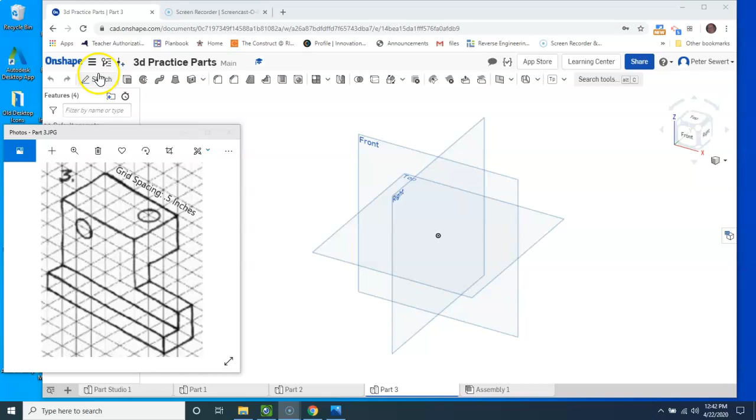I'm going to start my sketch plane on the right side, and then view normal. I'll start with my customary rectangle, and come up. The first dimension here, when I counted all the blocks, was 2 by 2.5 tall. There we go.

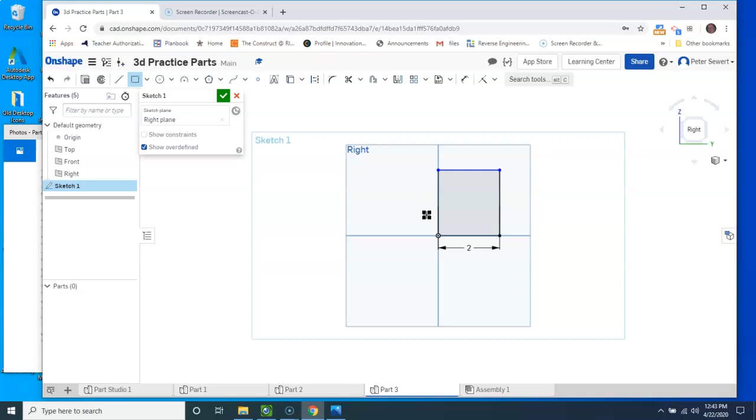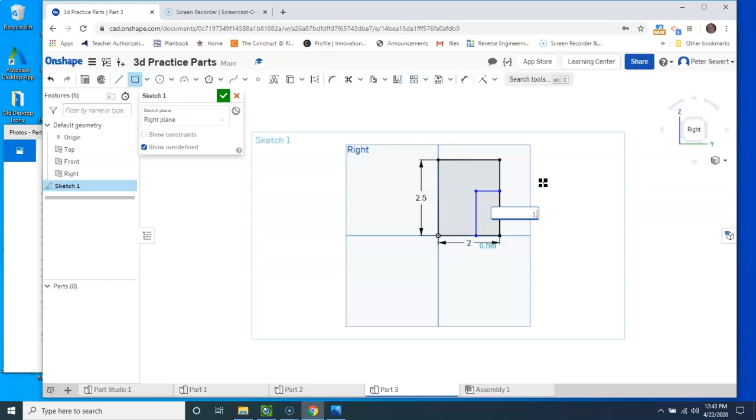Now I'm going to start cutting stuff out. So the rectangle tool still, I'm going to come out here and down that lower right corner and click, and then my first dimension is the height, and that is going to be up 1.5, and on the x-axis it goes in 1, and then I'm going to put another rectangle.

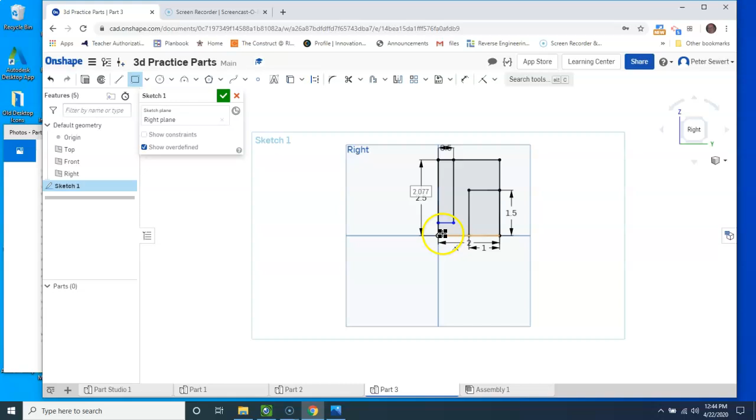I don't know why, this was the one that gave me all the fits a few minutes ago, and this is going to be 0.5 in, and that dimension there is going to be 2 inches. And I'll green check mark this and do the isometric view, and I'll turn off my planes since it's getting a little hard to see.

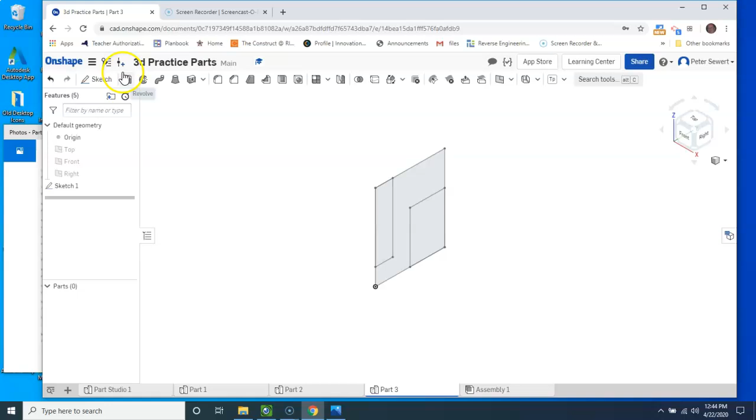And now we're going to do the extrude, and I'm going to extrude that out, and that is a distance, when I look at it along this axis right here, that's a distance of 4. Okay, check mark.

Now, the other thing that has to happen here when you take a look at this is that there are 2 holes. There's one on this surface and there's one on this surface. You could do these holes one of 2 ways. You could just put a sketch plane on here, draw the holes, dimension it, and do an extrude cut through. Same thing on this one.

But these softwares has a better way of doing that, and that's what's called the hole command. So I will start with this one up here. First of all, the diameter of the holes is 1/2 an inch, and this one's back from the back wall in 1/2 an inch, and from this front face back 1/2 an inch. So we're going to start with this.

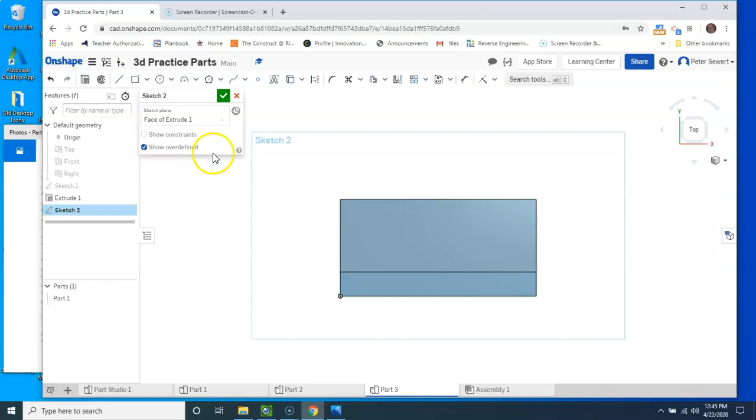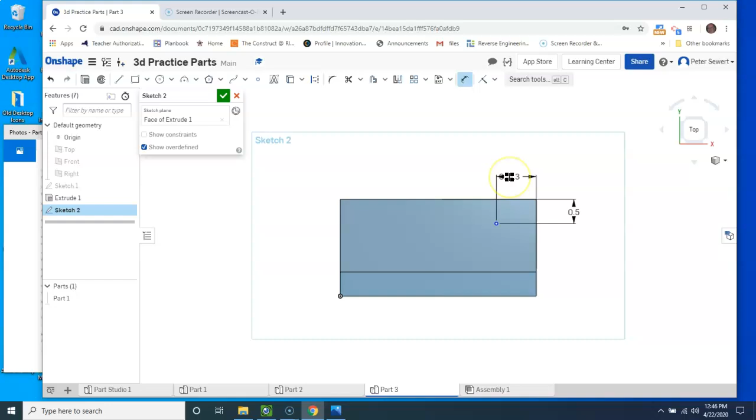So I'm going to put a sketch right on this surface. I'm going to right click and say view normal to, and then I'm going to do what's called a point. Holes are always located by using points, and I'm going to dimension from that point to there, and that's going to be 0.5, and then from the point to this front edge, that's going to be...

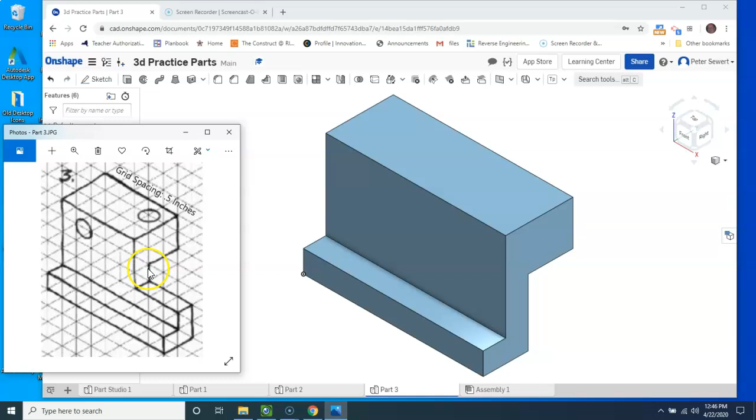Oh, you know what, I goofed. I forgot. Right click, isometric. I forgot all about this cutout right here. So that cutout goes down 1.5, and it goes back 1.5 inches. That was my mistake. We'll do the point in the hole in a second.

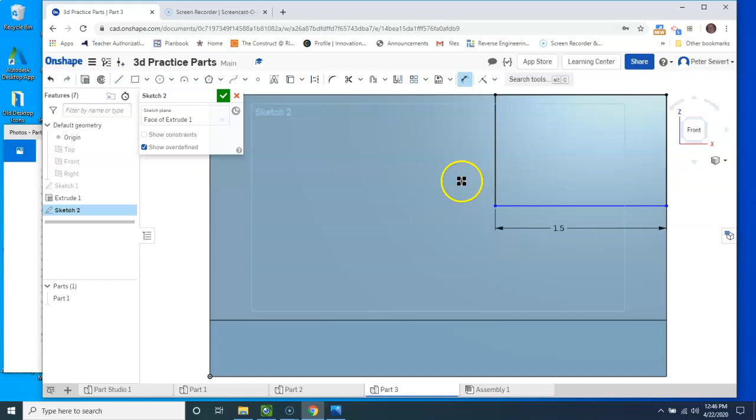So we'll do a sketch plane right on this front surface, and I'll select front. Then I'm going to come here, and I'll start my corner. That was a goof. All right, and then I'm going to dimension. This goes back 1.5, and it comes down 1.5.

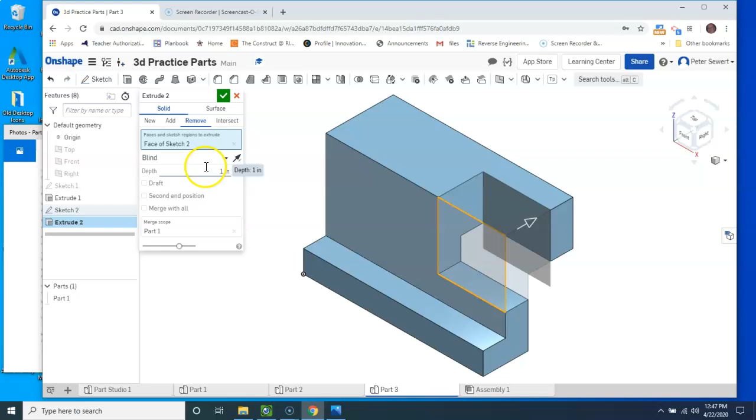And then I'm going to isometric view this thing, and then extrude, remove, faces to remove is that one, depth is going to be through all, green check mark. Okay. Now I can do my point.

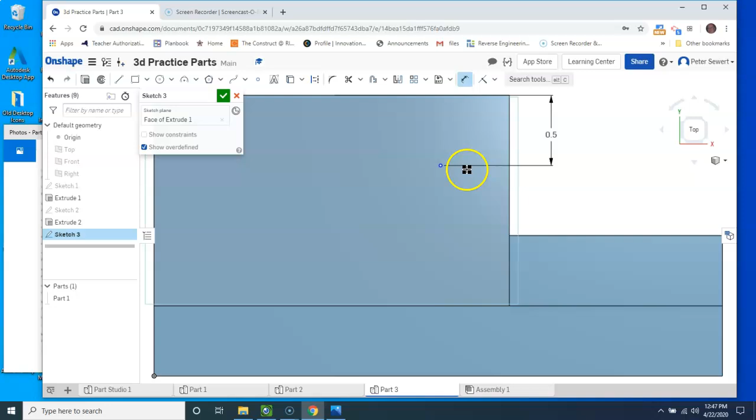Now I'm going to use the hole command, and this is the hole command right here. If you leave your cursor on these things, they'll give you a little dialog box that tells you how to use them, but I'm going to select that. First thing is, this is a simple hole. It's just a round hole going through the thing. As I just said, it goes through, because you can actually put in a distance if you want a hole to go what they call blind, but this is going to be through. And the diameter right down here, you change your diameter to 0.5 if it comes up with something different.

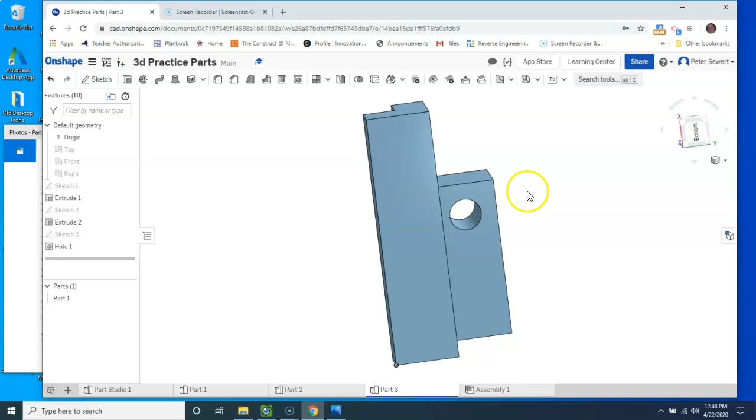And then I click where it says sketch points to place holes. So I just click on that, and then I green check mark, and what you'll see is the hole appears. Now I'm going to just mention to you that instead of using the view cube, which I could do, I can right click on the mouse and just use the rotate command. This rotates things so that you can see them.

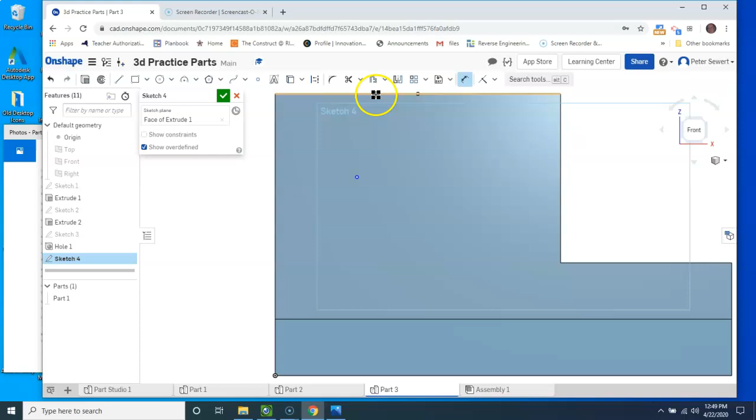Okay, sketch plane on this front surface. I'll view this right from the front. I'm going to put my point on because this is another hole. And I'm going to dimension this one from here to up here. And when I take a look at this part, you'll notice that this is down one, and then one block.

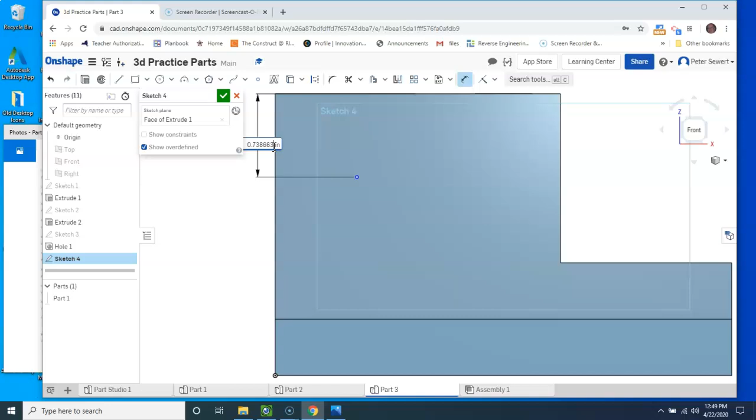So it's a half an inch down, and then it goes back one and then a half. So it's going to be down 0.5, and then the distance from this left-hand edge to the center of the point is going to be 0.75, because it's half of one and a half blocks back, I should say. Okay, click, right click, isometric.

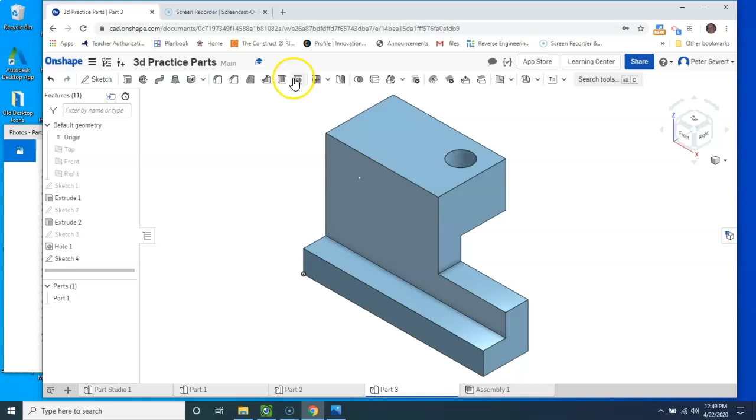Hole, and click that point. It had all my defaults from the first time around, and you can see that that hole is right in there now. So that is part 3.